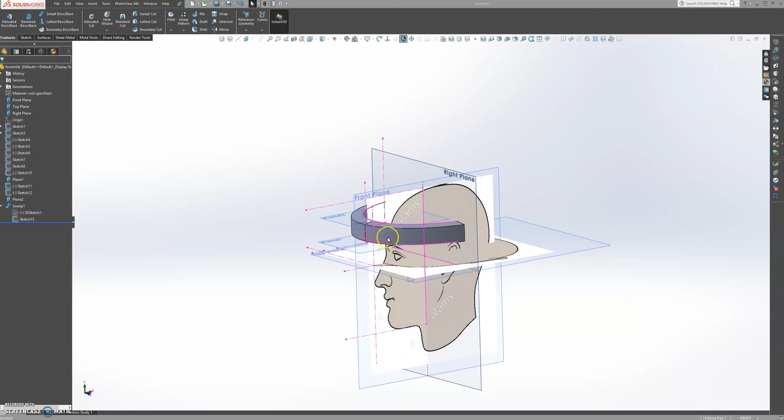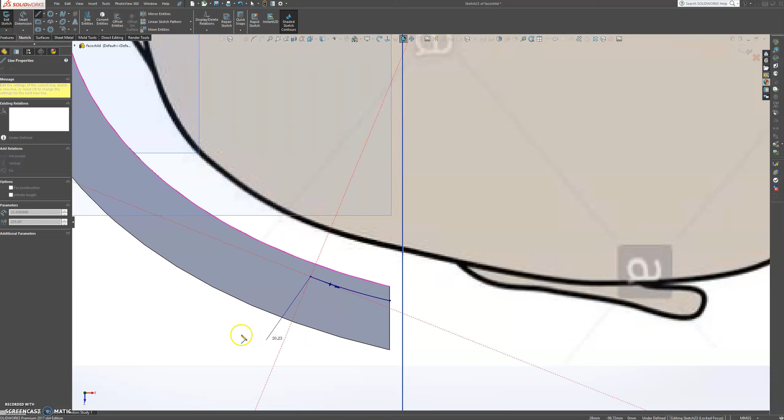Let's start by creating a sketch on this plane 2. Okay, and we're going to add a spline here, and we're going to snap somewhere about here, all the way in about that far. Press escape, and we're going to manipulate this spline a little bit, about that much, and we're just going to use a line, and we come out somewhere about here.

Okay, and now we're going to mirror this whole thing over to the other end. Let's choose this entity and this, and then we mirror about there. Okay, and now let's close these lines so that we will be able to cut all the way through.

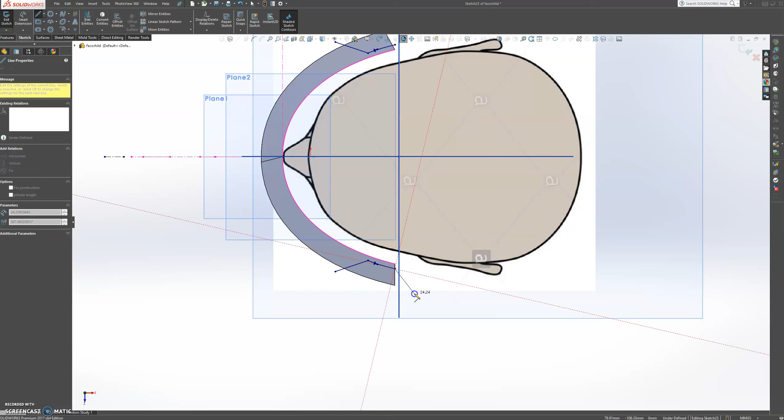Okay, right, so now go to features, go extrude, and we're going to choose through all, and then press OK.

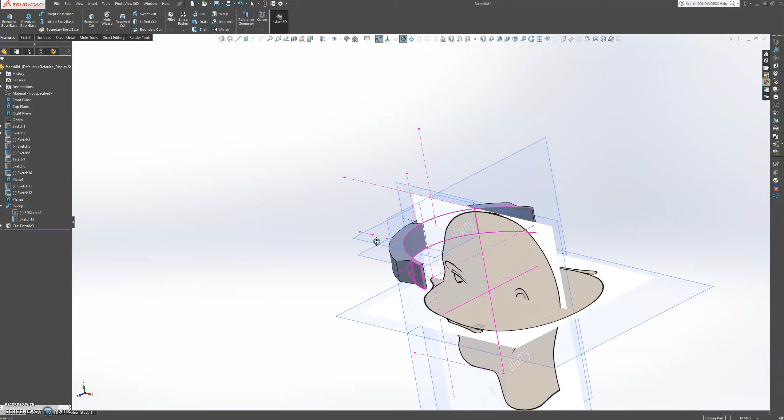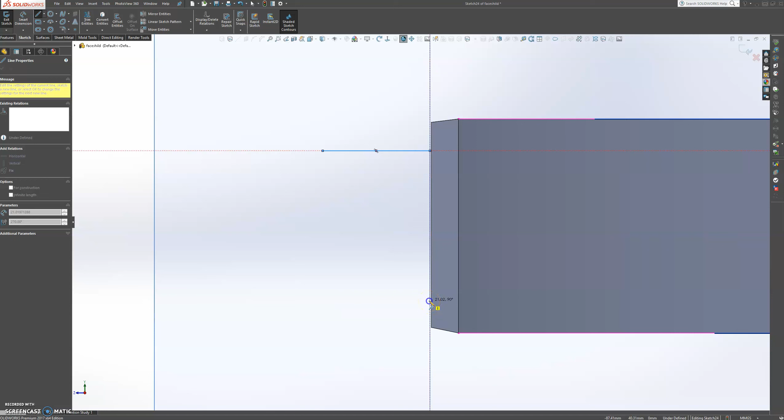Now we're going to make a sketch on this edge here. Make a sketch. Okay, and then just select this line, and we're going to go, maybe we're not going to go all the way to the wall, just about there, and then down here we give about the same much. All right, let's close this to close these lines.

Okay, right, and then let's see, maybe we can increase a bit. Right, no, we're not going to do that. Just check that. Okay, maybe add a little bit. Okay, that is perfect like that. Maybe just a bit about there, and at the bottom as well. And again, I'm just going by the eye at the moment because it don't need to be that precise.

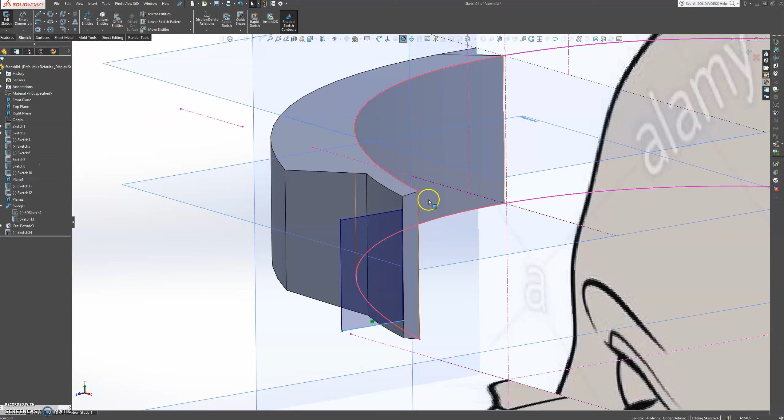Press OK on that. However, the size is, because we did determine the size of the head, it's going to be completely perfect fit. So we're going to sweep cut all the way through on that one.

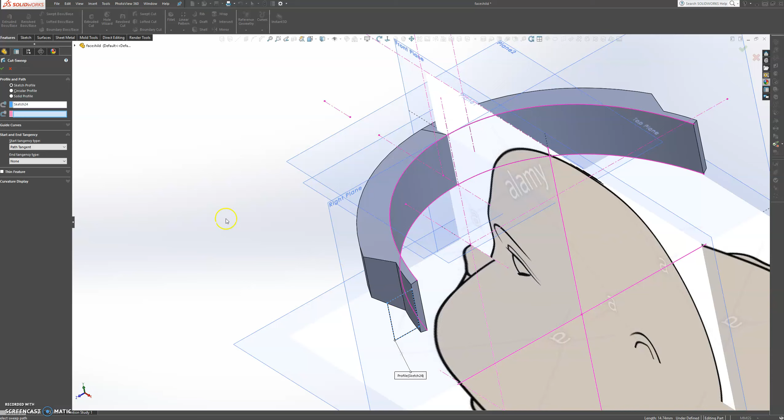So let's choose, let's exit first, exit the sketch, and we're going to go to sweep cut. Okay, and the program already selected the sketch automatically. So now we just need a path, and for the path it's going to be this line here. It's cut us all the way through very nicely. Perfect, exactly what I wanted.

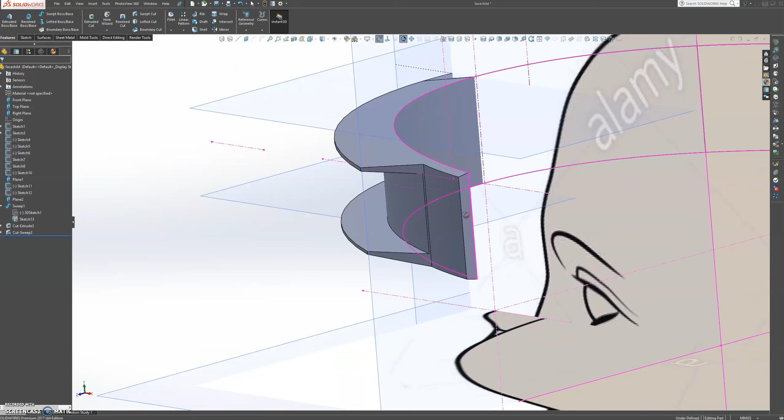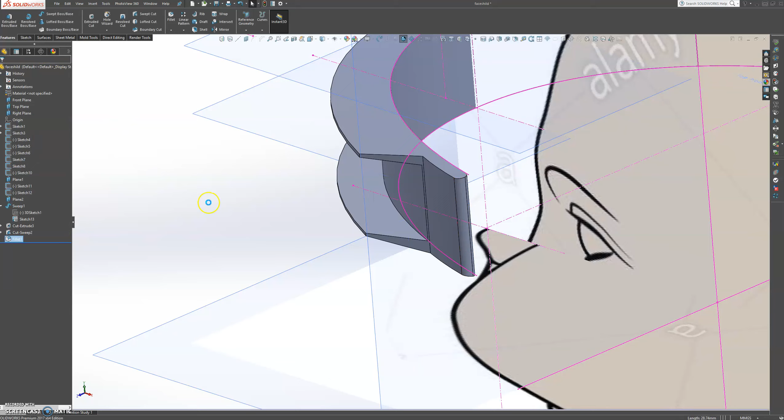So now what we can do is add a little bit of fillets on the corners here, just a tiny bit, just to not have any sharp edges though. Maybe just select one to begin with, on both sides, maybe two. Oh, two looks better. Press OK on that. I'm going to add the fillets on this side as well. Okay, 2 is perfect.

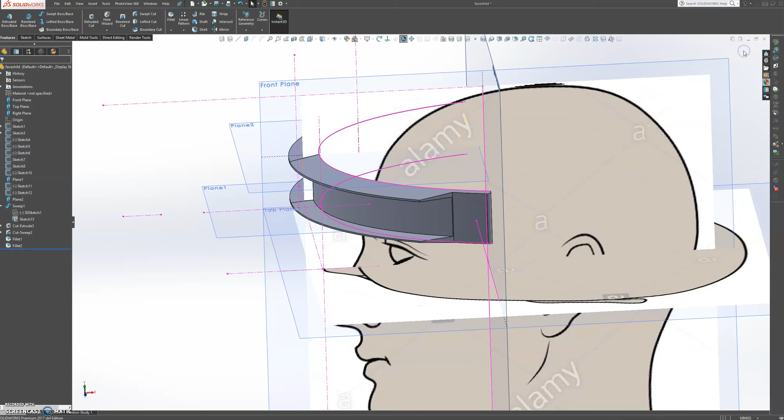Okay, and then we're going to sketch on this end here. Let's exit this sketch. We're going to sketch, not edit sketch. Exit the sketch. Okay, so it's not, because it's not a flat surface, that's why it won't let me sketch. But for that reason, we're going to create a sketch on this plane. And we really don't need to do this, but I'm still going to make this cut.

I'm going to choose a center rectangle, snap from there, from this end. Okay, and snap about that. Right.

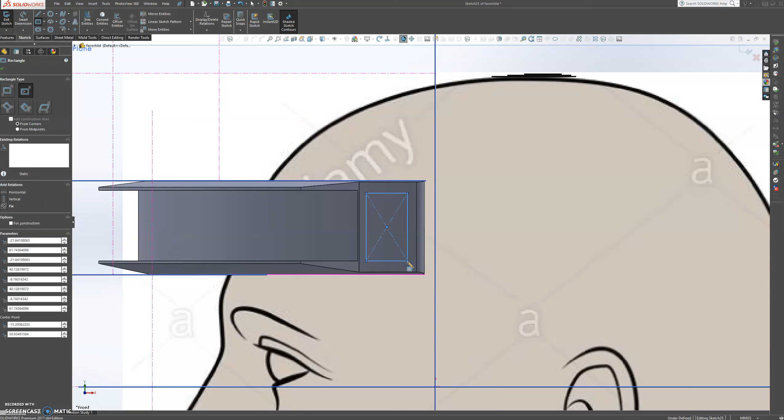And I'm just gonna go to Features, extrude that cut, and I'm gonna go cutting this way. Perfect. Okay, and then of course what I should have done is cut extrude both ways, which I will do.

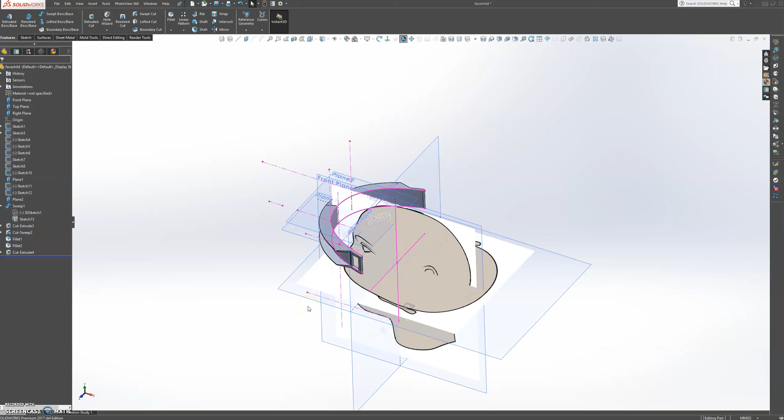So I'm just gonna go back, Control Z, and I'm gonna go to cut extrude again, and I'm gonna go both ways, mid plane, right, all the way through, and now we have cut. Perfect.

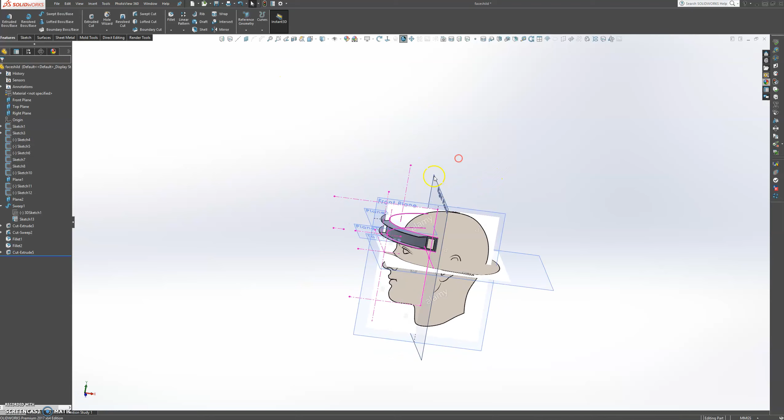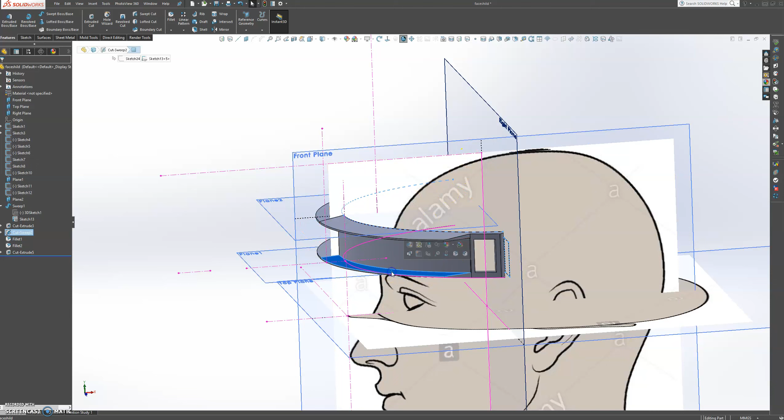Okay, so now I want to make these a bit thicker, or should I keep it this way? You know what, we're gonna keep it this way. So I want to make some posts going up on this section here. Let's start by sketching on this face.

We're going to create some lines. So we're going to choose a spline, and we're going to snap from this end to this end, and we're just going to pull it up. We're going to set this as vertical. That is perfect.

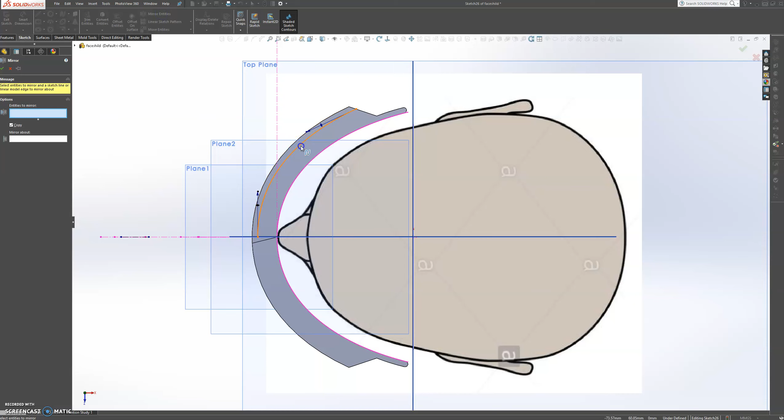And we're going to mirror this over to this end. So mirror, select entity, mirror about here. Perfect.

Okay, and then we're just going to offset this line that you just created. We're going to reverse it, add about 1, maybe 2. Let's try 2.5. Okay, 2.5 is perfect.

Right. And then now we are going to take some circles, and we're going to add some circles about here, and we're going to mirror this circle over to this end. So just exit, hold down Control, select the other circle, make the two equal, and press OK.

And now let's make a mirror. We still have a center line here. So mirror, we're going to select the circle, and we're going to mirror about there, and that is perfect.

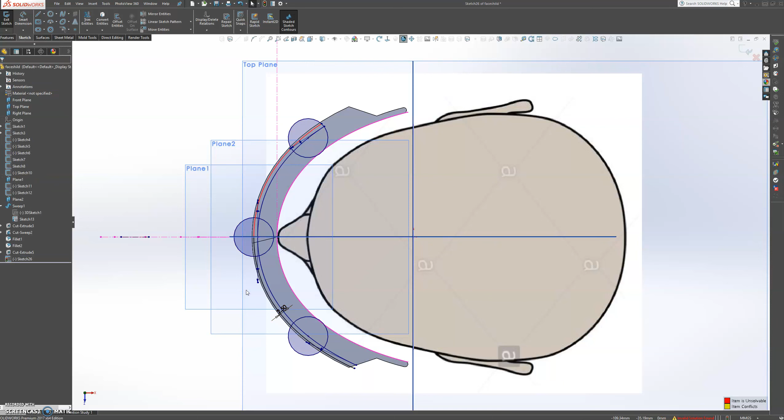Alright, so now we're going to trim out what we don't need. That one there, that one there. Okay, let's do it a different way. Let's trim out the inside of the circles first. Okay, perfect. Trim out that one, let's trim out that one.

Let's trim out that one. This one here, and finally that one there. Oh, hold on a second. That's not how I imagined it.

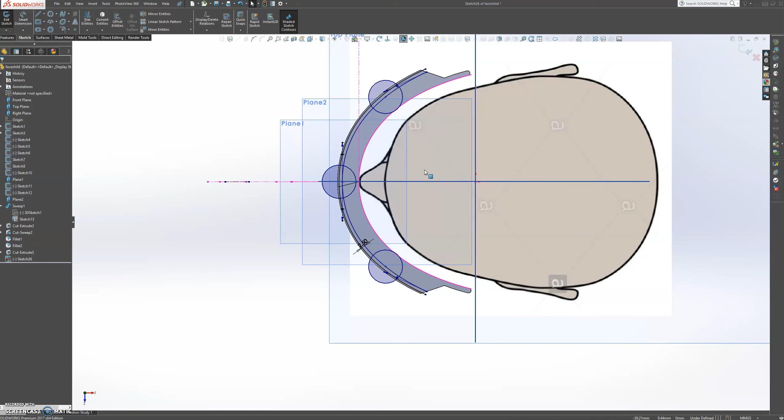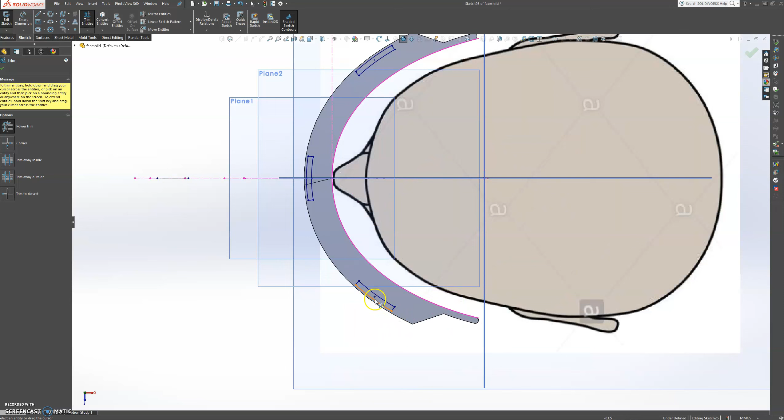Okay, so what we need is this inside part here. So let's snip that. So let's trim out these lines. This one, this one, this one, this one. We're going to need these inside parts. This one here, this one here, this one. Okay, and I'm wondering if, yep, that's perfect.

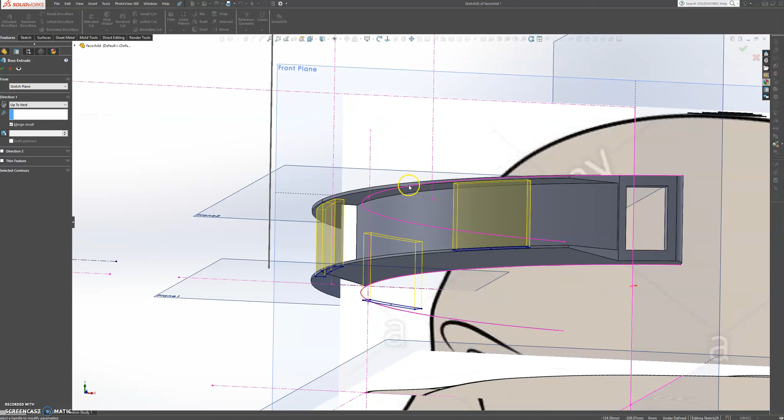And now what we're going to do is extrude this all the way up. So we're going to extrude, and we're going to go all the way up to next, and it will end exactly on that surface up here. Okay, press OK on that, and that added our solid surface right where we need it.

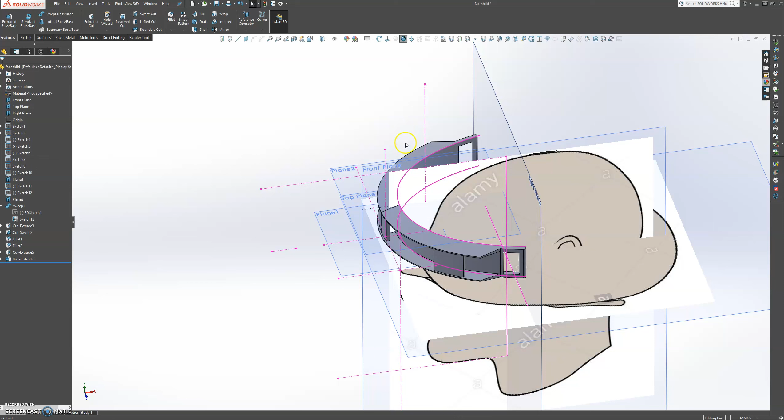Okay, so what we need to do now is create some cuts all the way through on this one, so the shield can come through, right?

So let's sketch on this plane, and we're going to offset this line. We're going to choose about, let's see, about 5, and we're going to reverse that, and then this line as well, and let's say maybe 4.5 would look better. 4.5, yes, it's more closer to the wall.

Right, perfect. Check that. And we're going to make another offset, this line, and make that 7, reverse direction. Okay, it's going to put it there. Yeah, let's make it about 8. Okay, 8 looks good, right, and then check that one.

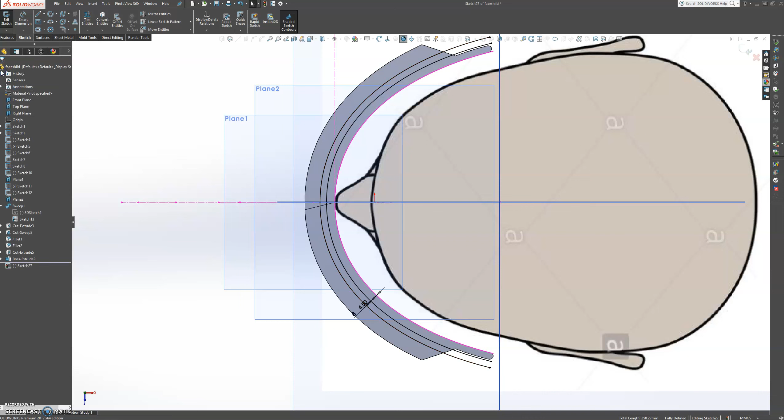Okay, and we're going to close this line up here, somewhere about there. Let's go perpendicular to this line here. Okay, and we're going to mirror this closed line over to the other end.

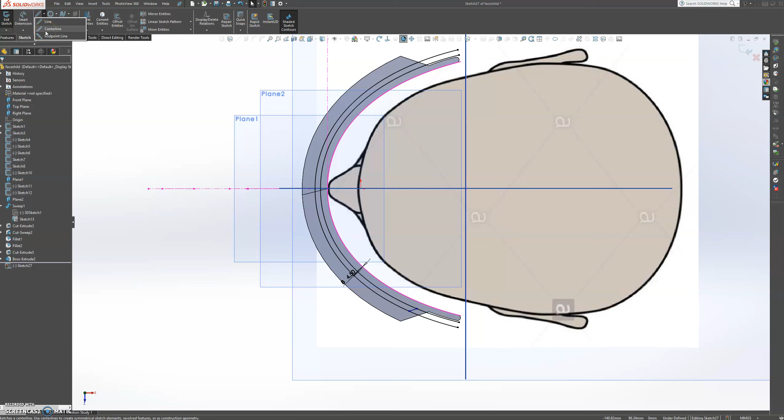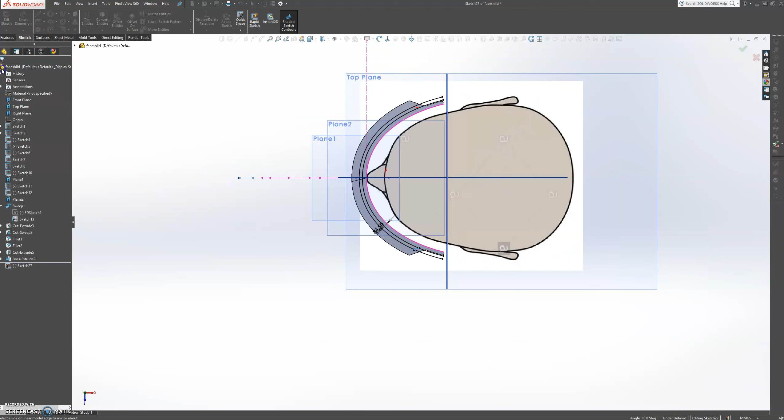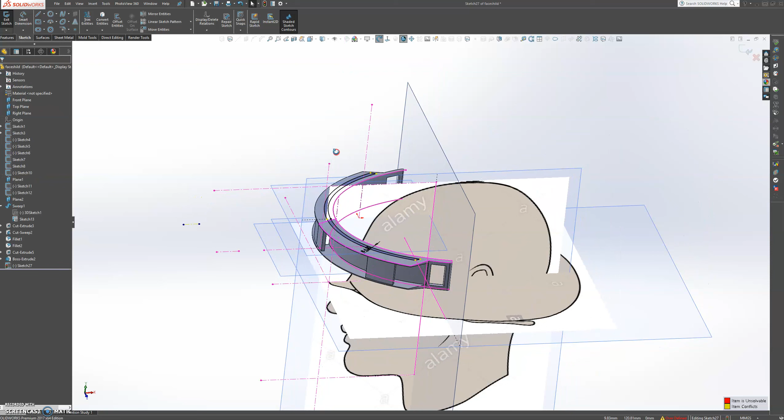Okay, here's a mirror. Entities to mirror is this line here. I want to mirror over there. Okay, press OK on that. And let's trim away the lines that we don't need. Alright, and now we're just going to do an extruded cut all the way through. Press OK on that.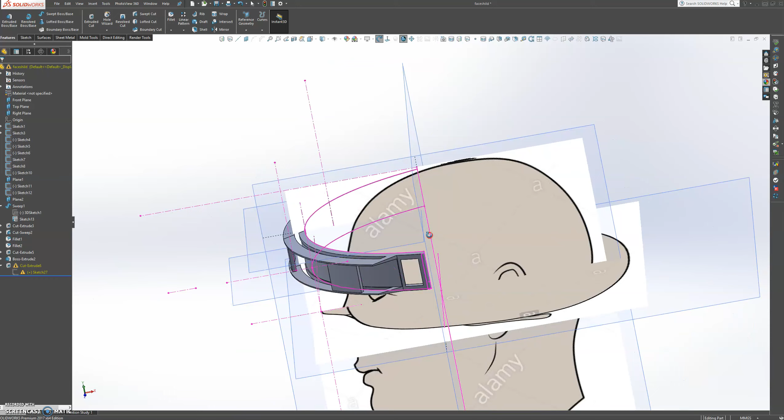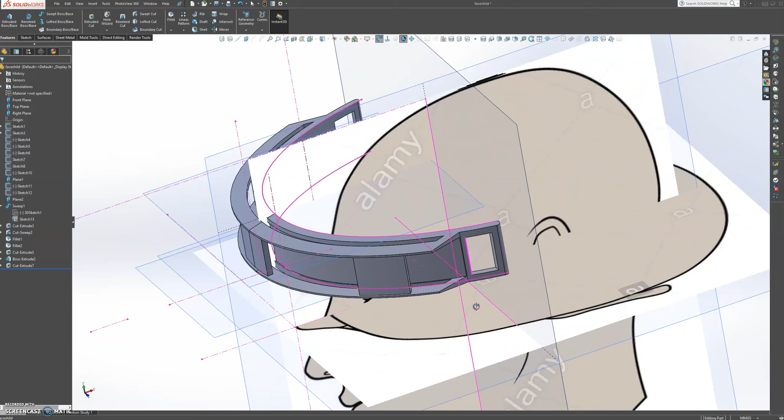Okay, so perfect. So now what we need is the hardware part, which is 3D printable, and I think it's pretty much done. So let's end here, and then we're gonna come back and create the shield that comes through, and the fabric rubber band that goes around, and the cushion for the forehead. Okay, see you again.